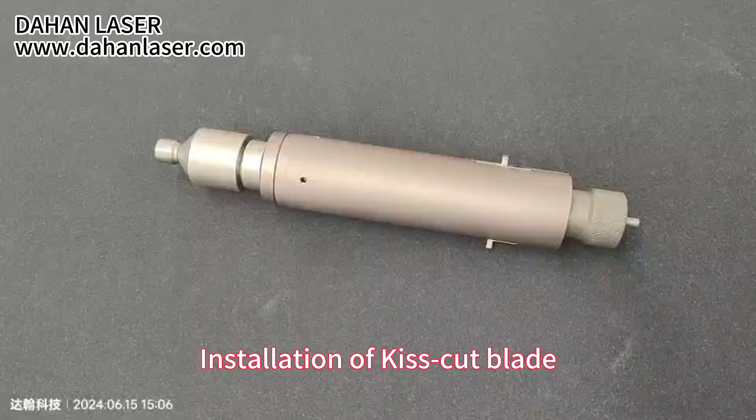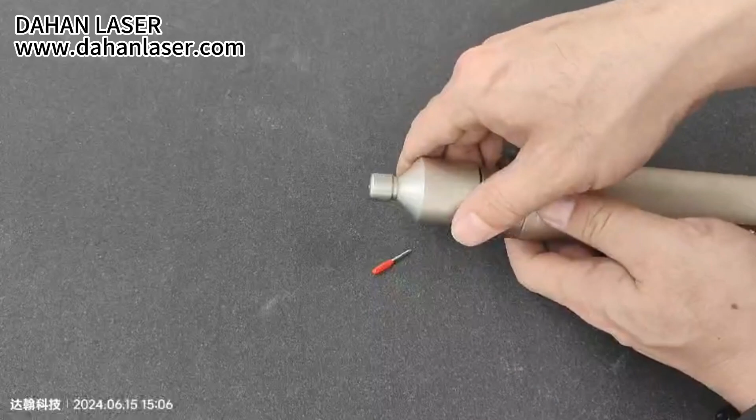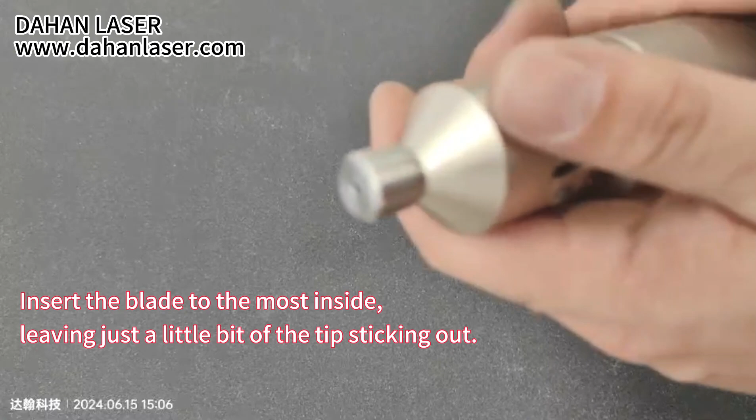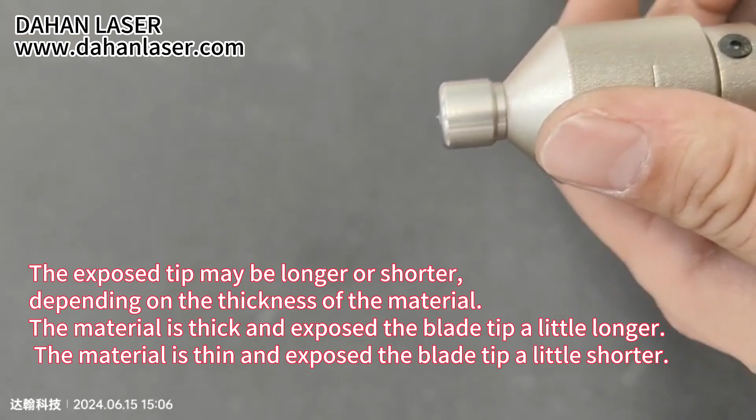Installation of kiss-cut blade. Insert the blade to the most inside, leaving just a little bit of the tip sticking out. The exposed tip may be longer or shorter, depending on the thickness of the material. The material is thick, expose the blade tip a little longer. The material is thin, expose the blade tip a little shorter.

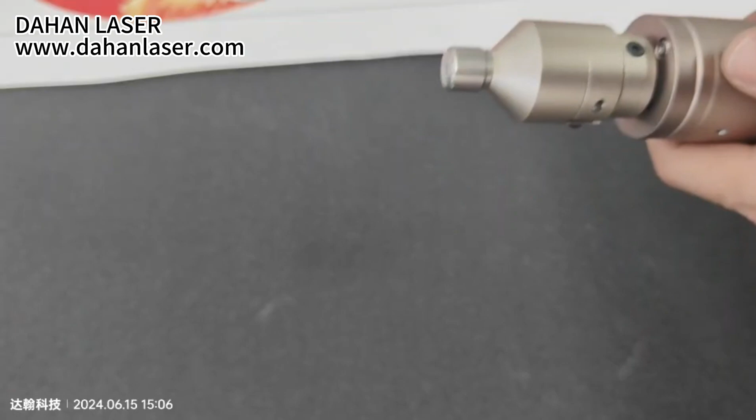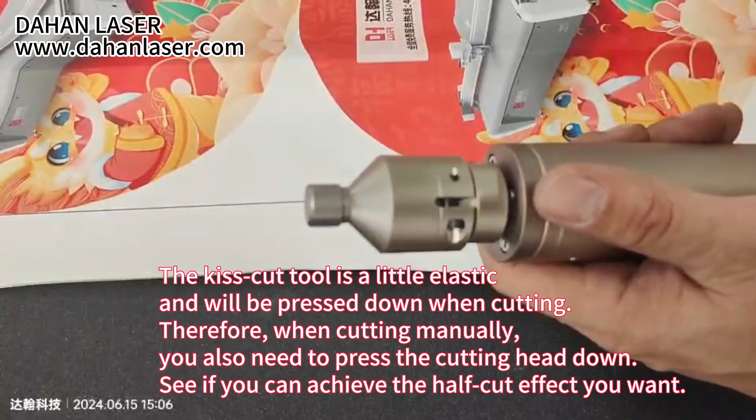After installing the blade, hold the cutting head, and then manually scratch the material to be cut. The kiss-cut tool is a little elastic and will be pressed down when cutting. Therefore, when cutting manually, you also need to press the cutting head down. See if you can achieve the half cut effect you want.

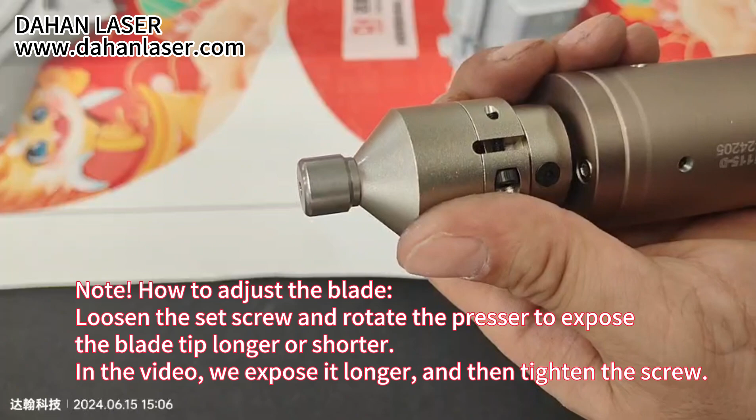If it cannot cut through or cannot achieve the half cutting effect you want, you need to adjust the blade again. In the video, you need to expose the blade a little longer. Note how to adjust the blade. Loosen the set screw and rotate the presser to expose the blade tip longer or shorter. In the video, we expose it longer and then tighten the screw.

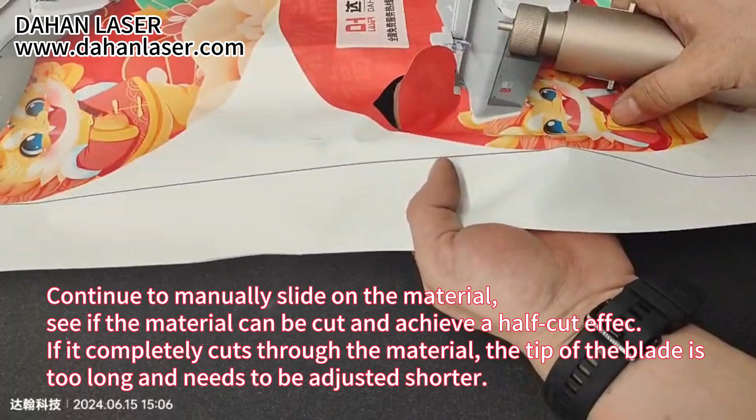Continue to manually slide on the material. See if the material can be cut and achieve a half-cut effect. If it completely cuts through the material, the tip of the blade is too long and needs to be adjusted shorter. Loosen the fixing screw and rotate the presser to expose the blade tip shorter.

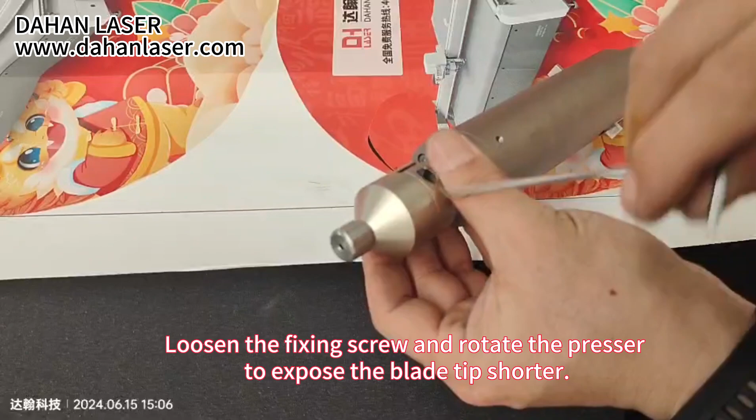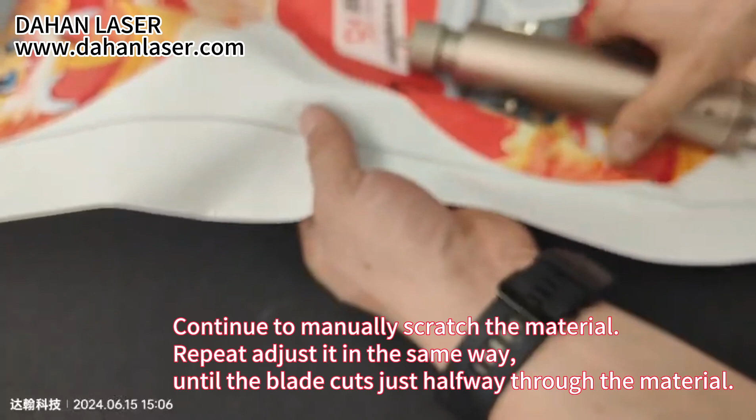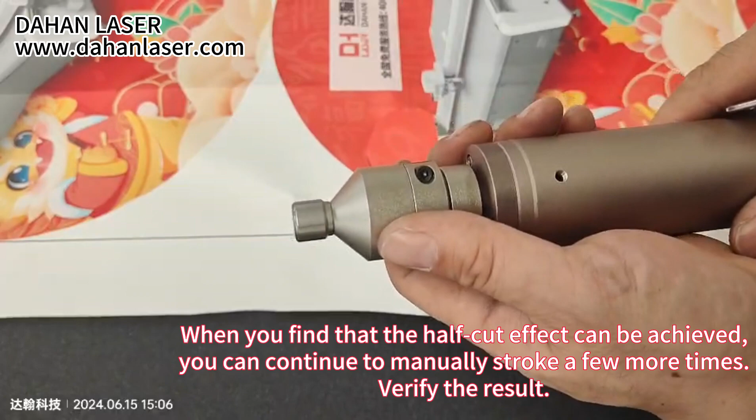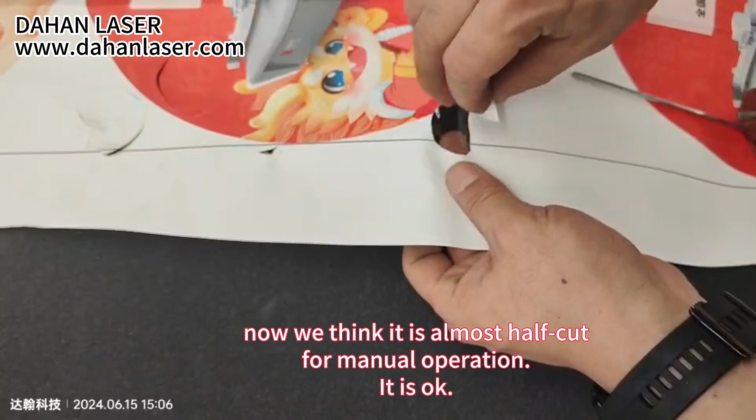Continue to manually scratch the material. Repeat adjusting it in the same way until the blade cuts just halfway through the material. When you find that the half-cut effect can be achieved, you can continue to manually stroke a few more times. Verify the result. Now we think it is almost half cut. For manual operation, it is okay.

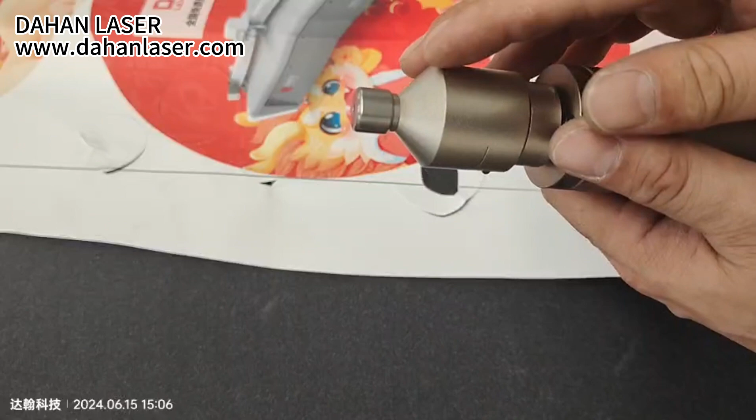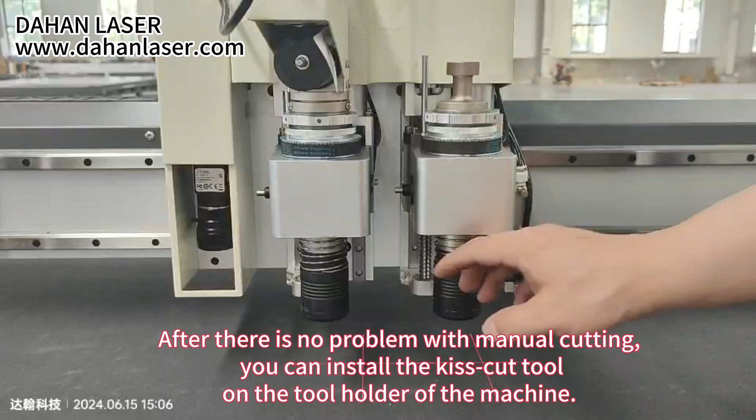After there is no problem with manual cutting, you can install the kiss-cut tool on the tool holder of the machine. Kiss-cut tool, drag tool, creasing wheel tool, and V-cut tool are generally installed on the same tool holder. That is, tool number 2. Only the vibrating tool, oscillating tool, is mounted on tool holder number 1.

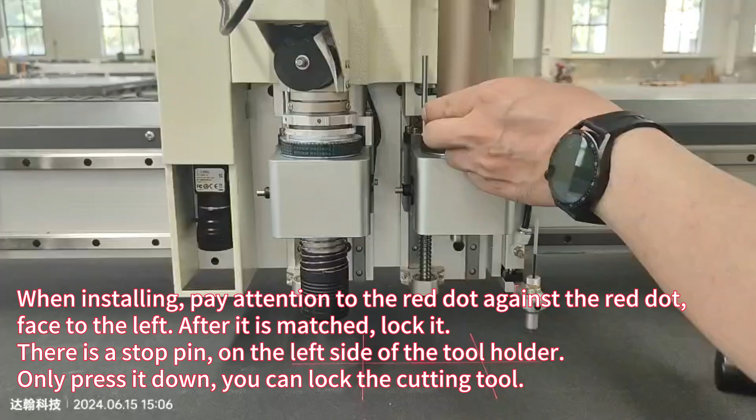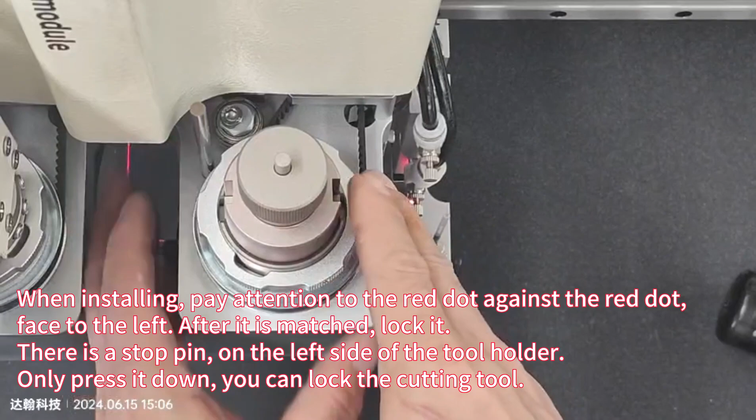When installing, pay attention to the red dot against the red dot. Face to the left. After it is matched, lock it. There is a stop pin on the left side of the tool holder. Just press it down and you can lock the cutting tool. Continue to check whether the blade depth is appropriate.

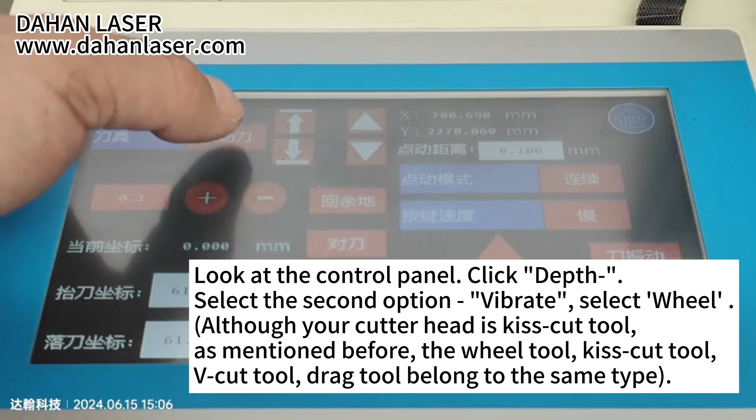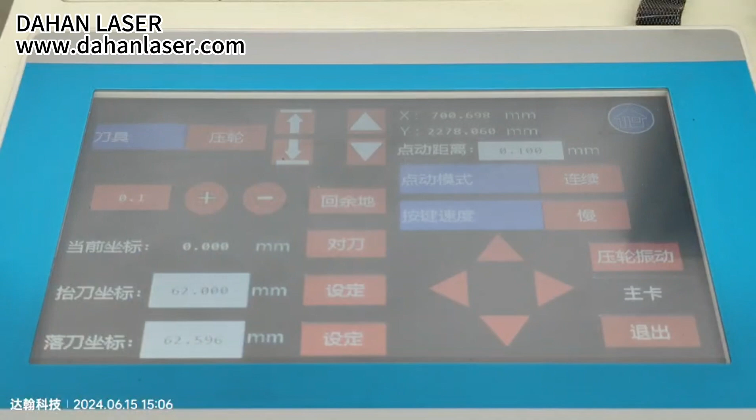Place the materials that need to be cut in half on the working table. Look at the control panel, click depth. Select the second option, vibrate. Select wheel. Although your cutter head is Kiss Cut tool, as mentioned before, the wheel tool, Kiss Cut tool, V-Cut tool, drag tool belong to the same type. After selecting the wheel, press the up, down arrows to control the rise or fall of the cutter head.

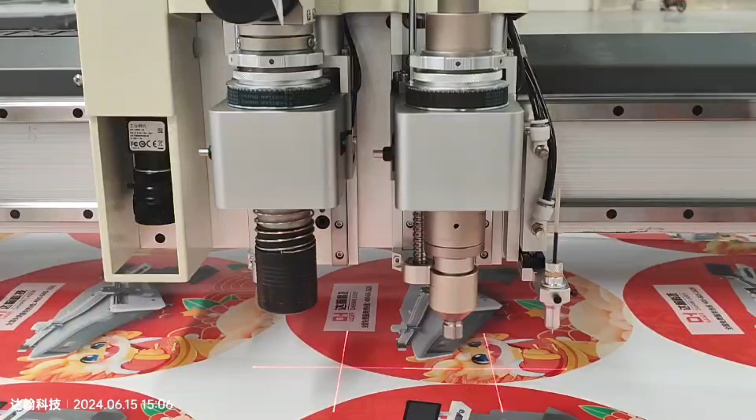Now press the direction arrows. Let the presser of Kiss Cut tool press down onto the material. Manually move the presser to check if there is a little space to move it up and down. Just a little bit up and down, then it is okay. Set down coordinates, click Set, and the system will automatically read the results of the manual adjustments we just made on the machine.

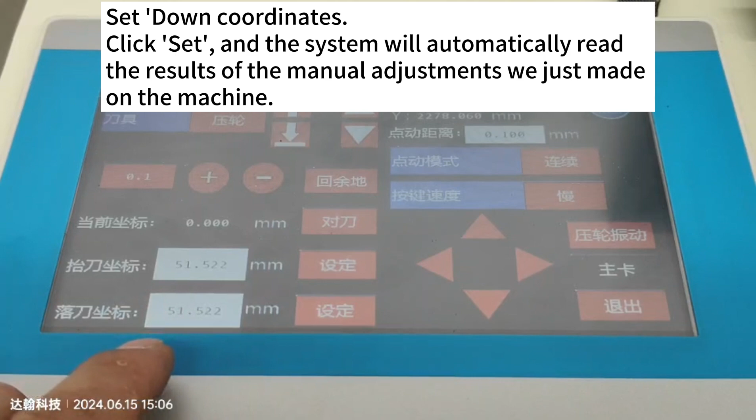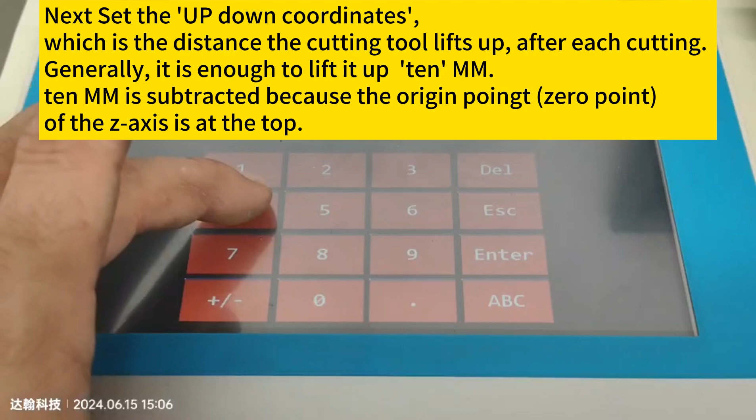Next, set the up-down coordinates, which is the distance the cutting tool lifts up. After each cutting, generally, it is enough to lift it up 10 mm. 10 mm is subtracted because the origin point, 0 point, of the z-axis is at the top.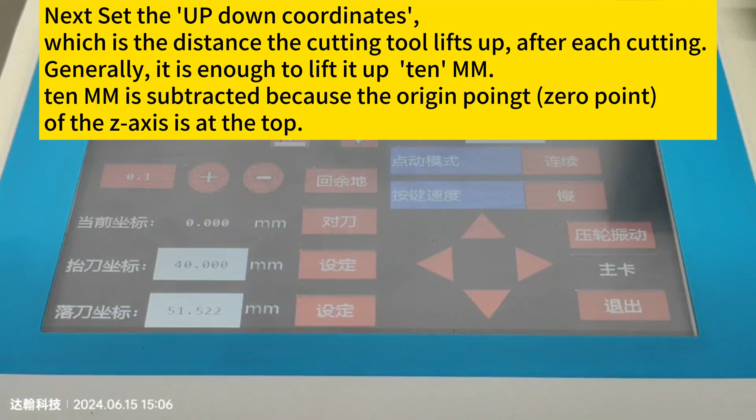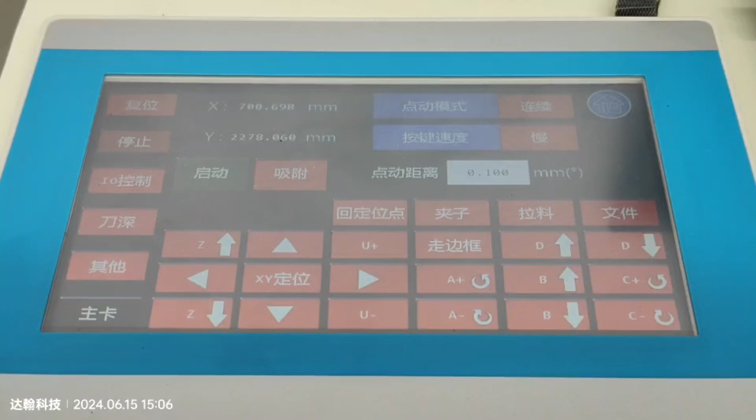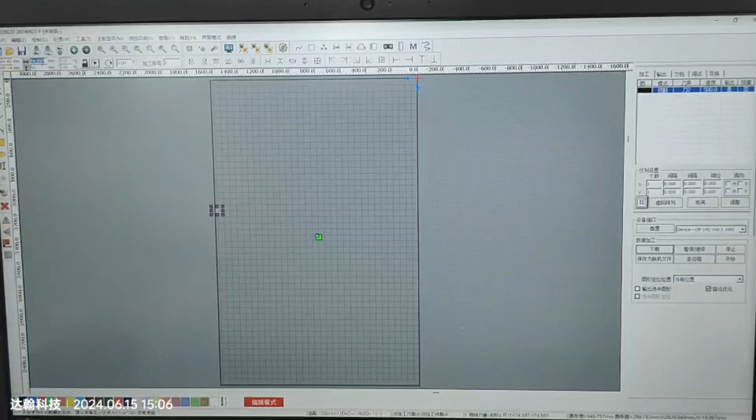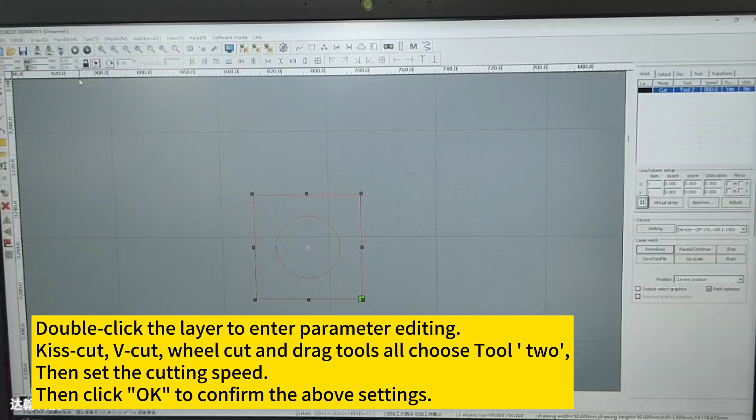After the panel menu is set, return to the operating software on the computer. Draw a random picture to test whether the cutting depth of the blade is appropriate. Note, the software uses color to distinguish layers. Double-click the layer to enter parameter editing. For Kiss Cut, V-Cut, Wheel Cut and drag, choose 2. Then set the cutting speed. Then click OK to confirm the above settings.

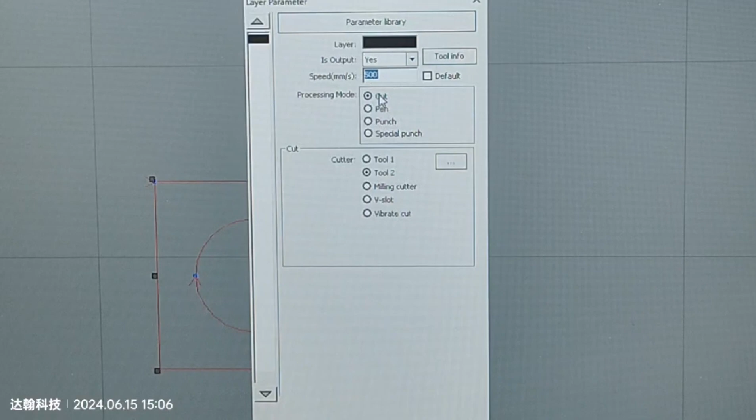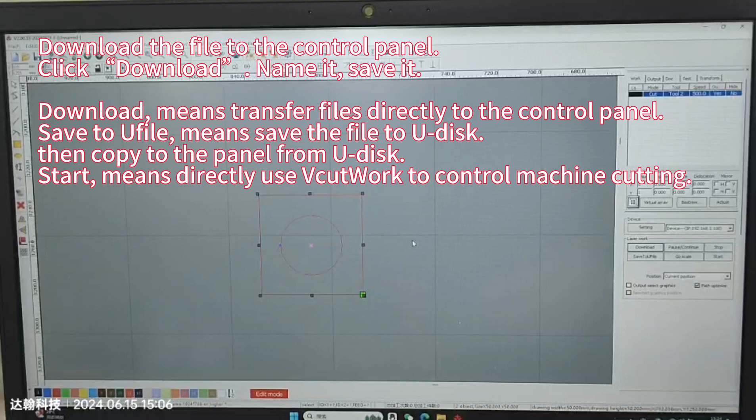Download the file to the control panel. Click Download, name it, save it. Download means transfer files directly to the control panel. Save to Ufile means save the file to U-disk, then copy to the panel from U-disk. Start means directly use VcutWork to control machine cutting.

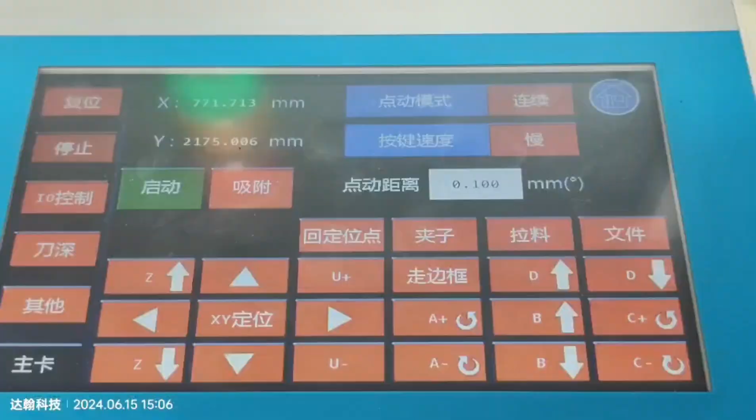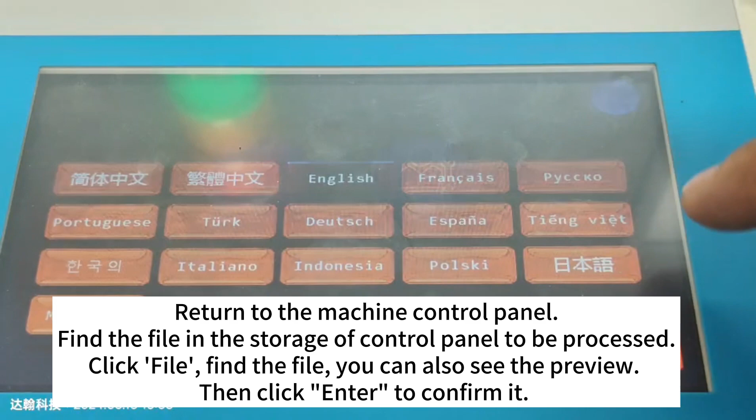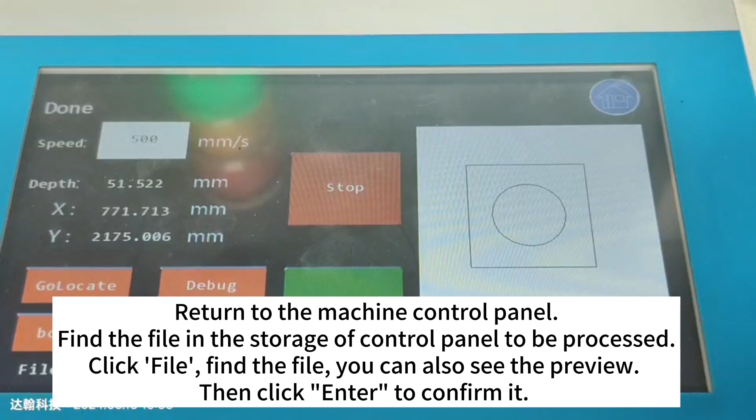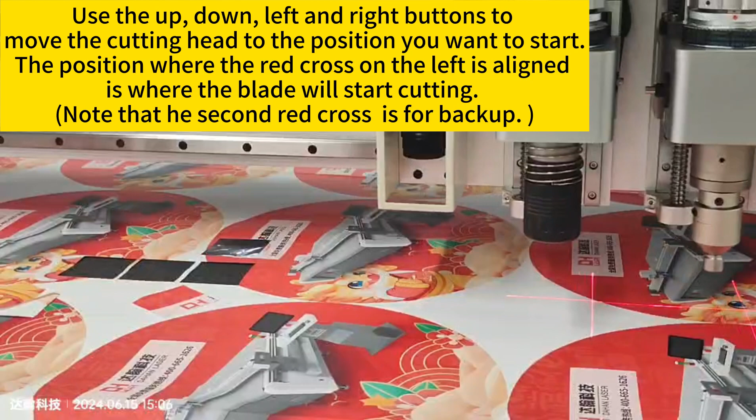Return to the machine control panel. Find the file to be processed in the storage of the control panel. Click File, find the file. You can also see the preview. Then click Enter to confirm it. Use the up, down, left and right buttons to move the cutting head to the position you want to start. The position where the red cross on the left is aligned is where the blade will start cutting. Note that the second red cross is for backup.

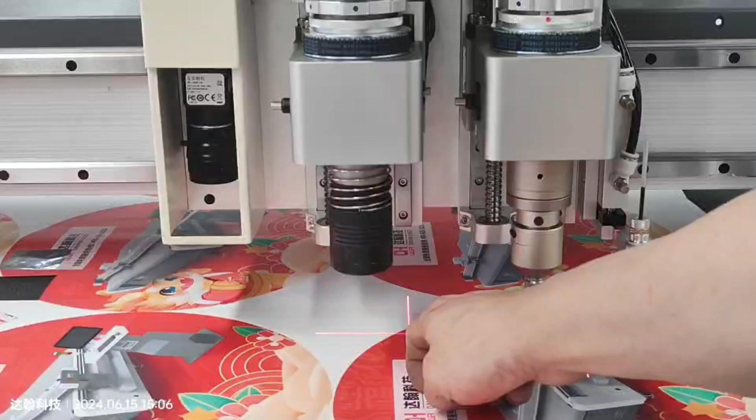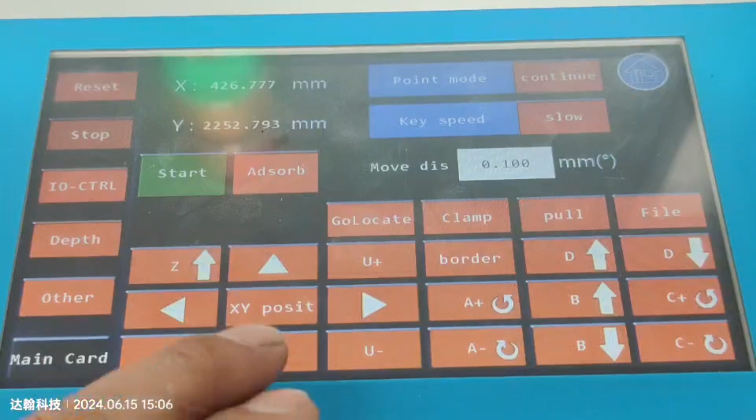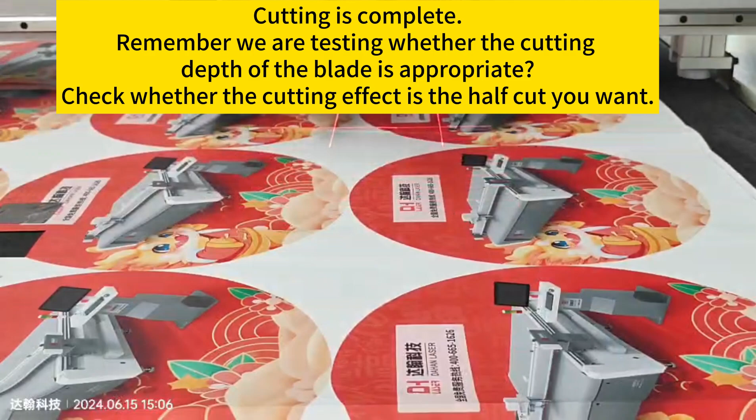After moving to the appropriate position, click XY position to lock this position, then click Start to start cutting. Cutting is complete. Remember, we are testing whether the cutting depth of the blade is appropriate. Check whether the cutting effect is the half cut you want.

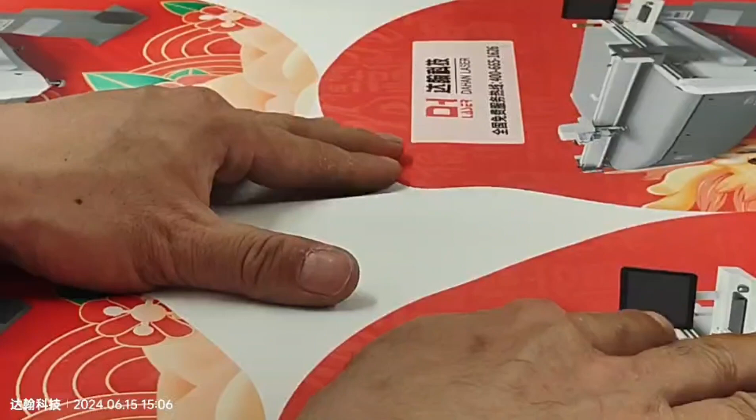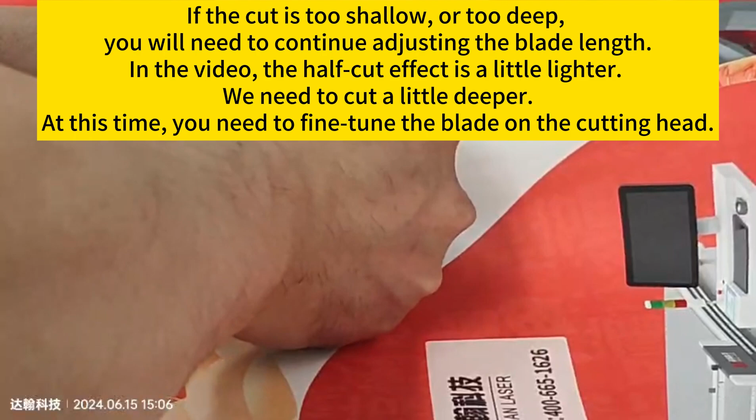If the cut is too shallow or too deep, you will need to continue adjusting the blade length. In the video, the half cut effect is a little lighter. We need to cut a little deeper. At this time, you need to fine-tune the blade on the cutting head.

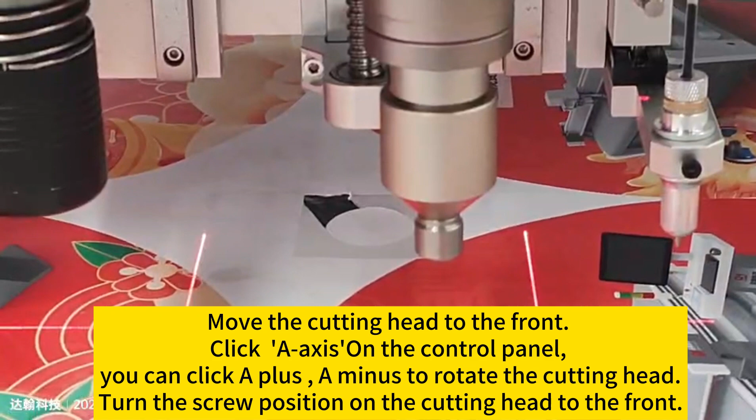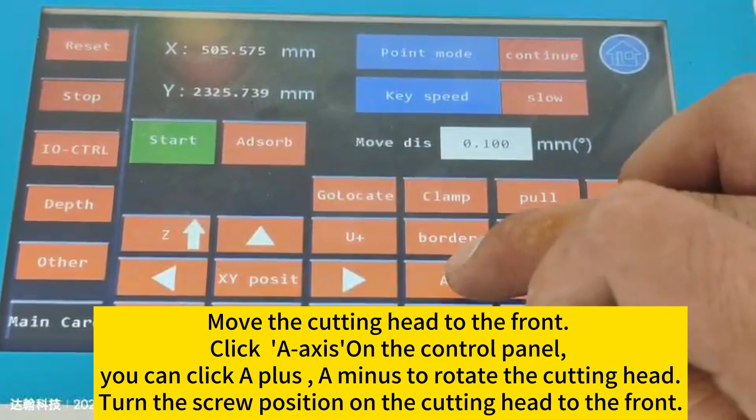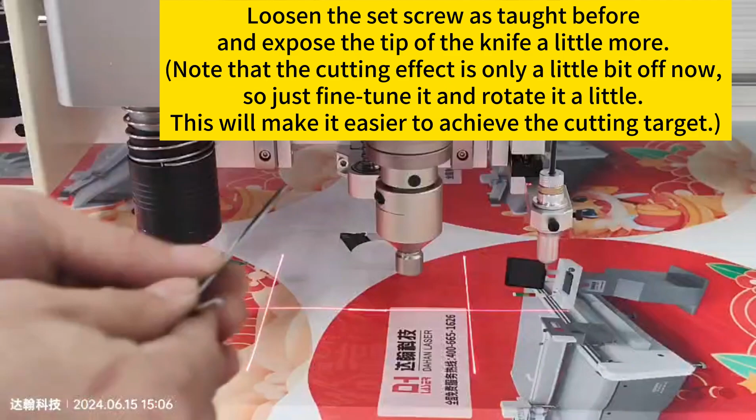Move the cutting head to the front. Click A axis on the control panel. You can click A plus, A minus to rotate the cutting head. Turn the screw position on the cutting head to the front. Loosen the set screw as taught before, and expose the tip of the knife a little more. Note that the cutting effect is only a little bit off now, so just fine-tune it and rotate it a little. This will make it easier to achieve the cutting target.

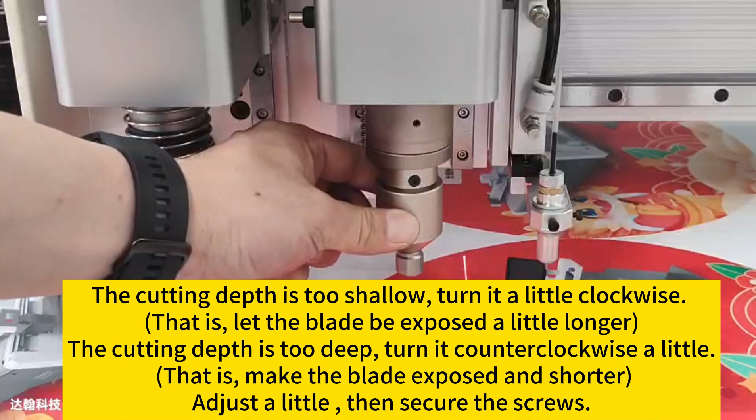The cutting depth is too shallow: turn it a little clockwise, that is, let the blade be exposed a little longer. The cutting depth is too deep: turn it counterclockwise a little, that is, make the blade exposed shorter. Adjust a little, then secure the screws.

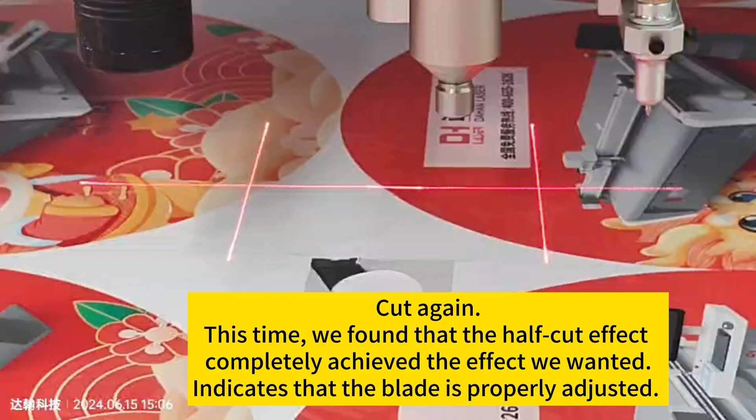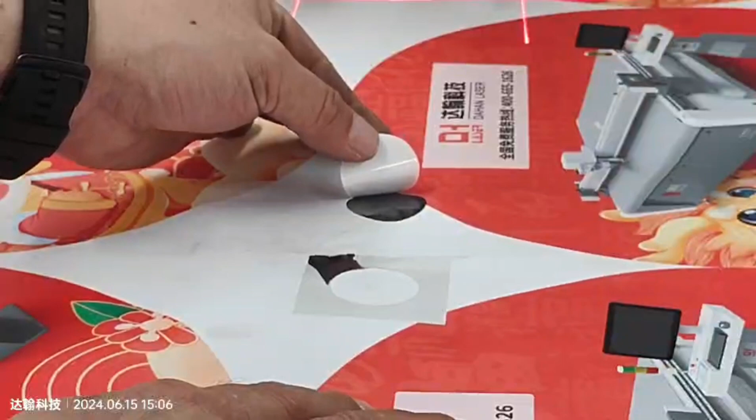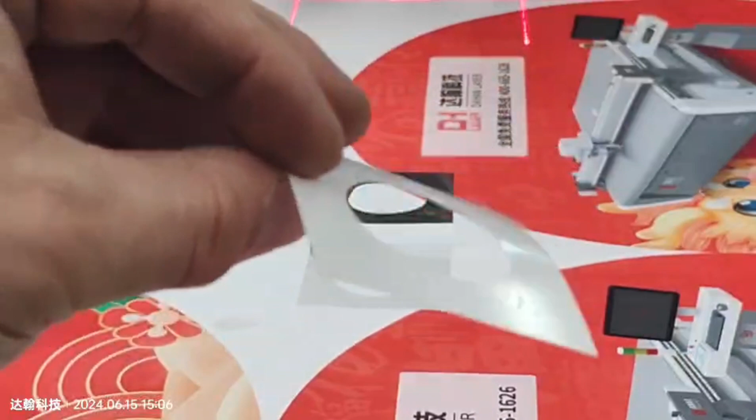Cut again. This time, we found that the half-cut effect completely achieved the effect we wanted, which indicates that the blade is properly adjusted. Cut a few more times in different locations. If the cutting is all half cut, that is it. End of debugging. Later, you can start to process.